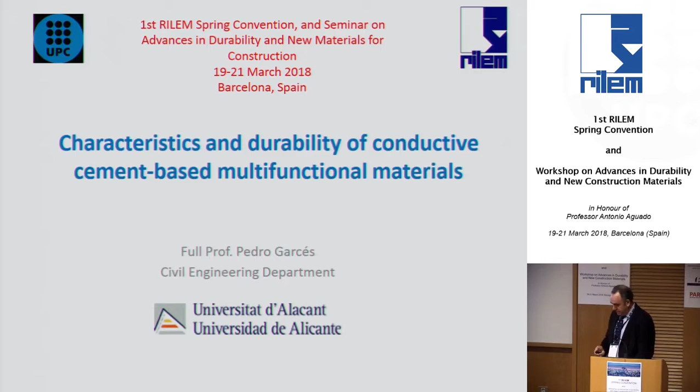It is widely known that the main function of concrete is a structural function. On the other hand, concrete is a dielectric, it's a bad conductor of electricity. However, the addition of conductive carbon materials such as graphite powders, carbon fibers, carbon nanofibers, and carbon nanotubes transforms the resulting mixture into a conductive material. This yields the possibility of using this material for other functions different than structural ones.

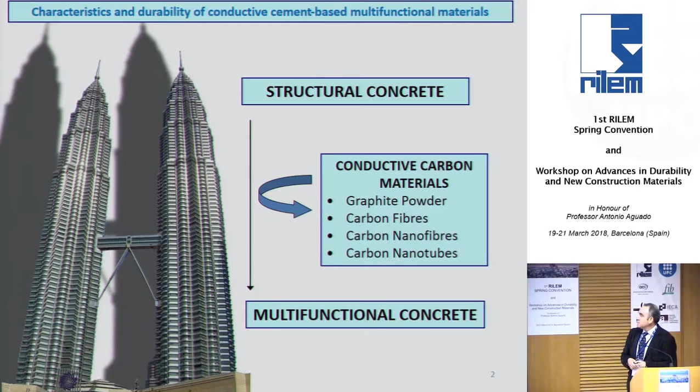Possible functions are electrochemical ones: electrochemical chloride extraction, cathodic protection, the possibility of using a conductive cement-based material as an anode in the application of this electrochemical technique is really very interesting from the point of view of durability.

Other functions not so related with durability, in which our research group is progressing in ongoing research, is the sensing function: the ability of a structural material to detect its own deformation when subjected to some external static or vibrating load. So we are in the presence of smart structures, and possible applications are structural vibration control, traffic monitoring, building safety, and structural health monitoring.

And the last one is the heating and de-icing function, to control the ice layer in transportation infrastructures.

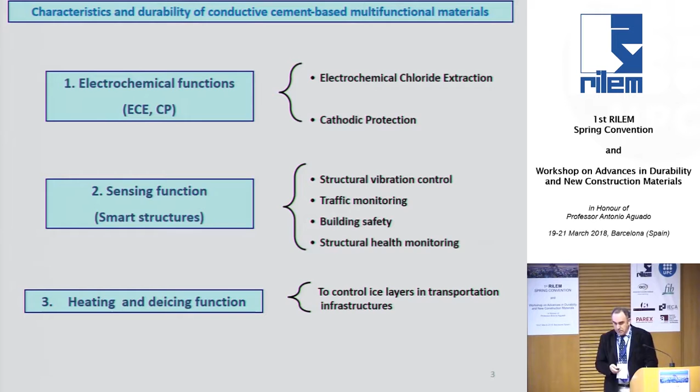As a specific task, our contribution to the MASTER project is focused on the development of the sensing and de-icing function. Here we can observe two pictures of cement-based material: with the addition of carbon fibers on the left side, and nanofibers on the right.

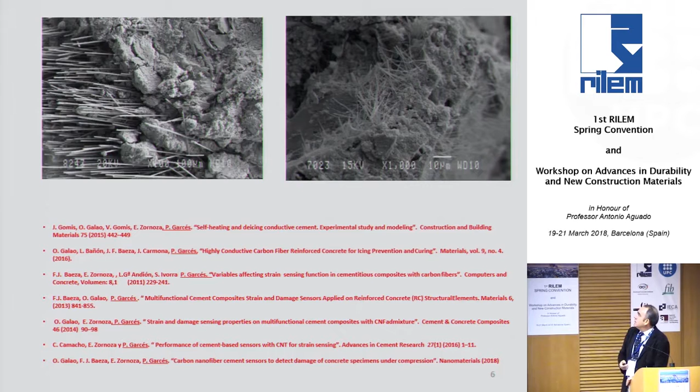Let me introduce two concepts related to my talk. The first one is percolation threshold. In order to limit the carbon additions, it is important to know the value of the property called percolation threshold. Percolation threshold occurs when there is enough density of carbon fibers to establish a continuous path of electricity.

Once the percolation threshold is reached, it is not necessary to add any more carbon fibers; it makes no sense because resistivity doesn't change significantly.

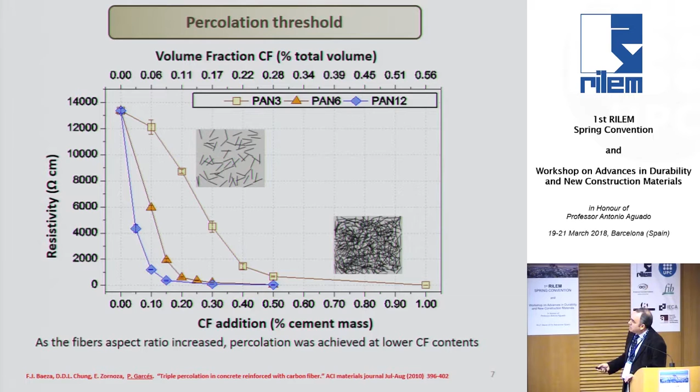Another concept related to my talk is resistance measurement. One measurement arrangement uses a sponge: a wet sponge and a copper plate, which is electrolytic resistance measurement. The other arrangement is without the sponge, using a silver paint, which is electronic resistance measurement.

In a research work developed in collaboration with Carmen Andrade, here presented, titled Electronic and Electrolytic Conduction of Cement Paste with Addition of Carbonaceous Materials.

The main conclusions, in my opinion, are: first, the electrolytic resistance of cement-based material depends on the volumetric fraction of solid cement phase acting as an insulator, and porosity acting as an ionic conductor, if water is present, of course. The second is that electronic conductive material added, such as carbon fibers, changes this behavior.

In the mix, the electrical resistance decreases in proportion depending on, first, the type of carbonaceous material; second, the size and shape of the material; and finally, the amount added, so the volumetric fraction in the mix. And finally, the interface contact between the material and the electrode is very relevant.

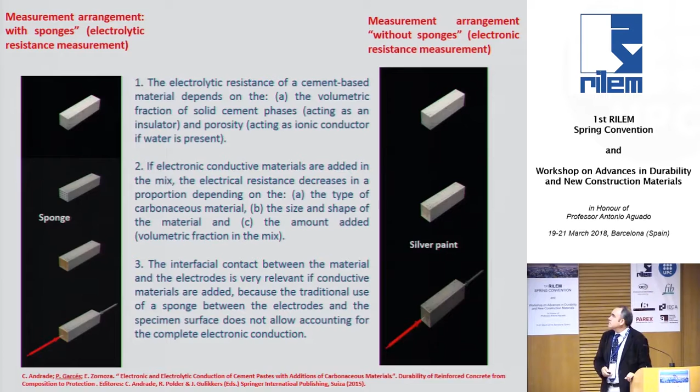Having said that, the objective of this research line has always been to develop electrically conductive cement matrix composites, paste, mortar, and concrete, so they can be applicable to the before-mentioned functions while keeping an appropriate structural behavior and durability.

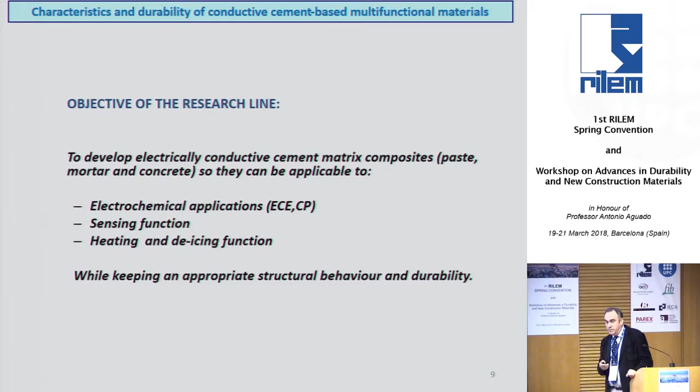Therefore, in the development of this research, we have always considered two steps. The first is the characterization of physical and mechanical properties of mortar and concrete with the addition of each and every carbon material. The second has always been focused on the corrosion level of the reinforcement in the formed cement-based materials.

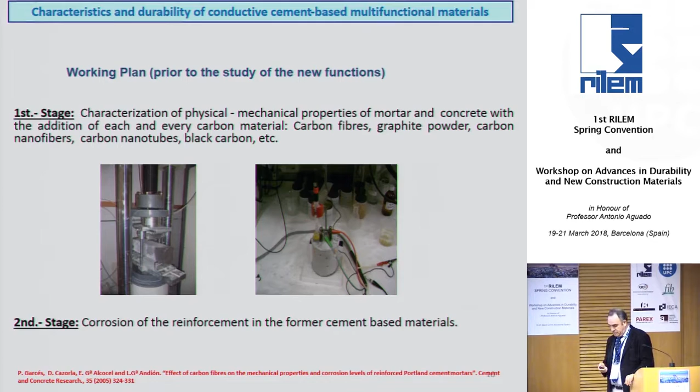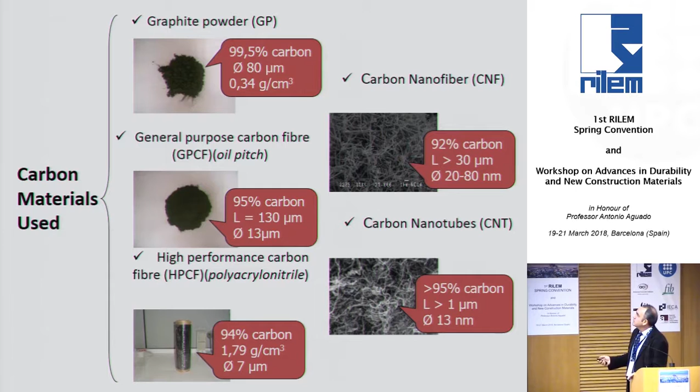Here we can see the aspect of different carbon materials used: carbon graphite powder, general purpose carbon fibers, high performance carbon fibers—the difference being in the origin—carbon nanofibers, and carbon nanotubes.

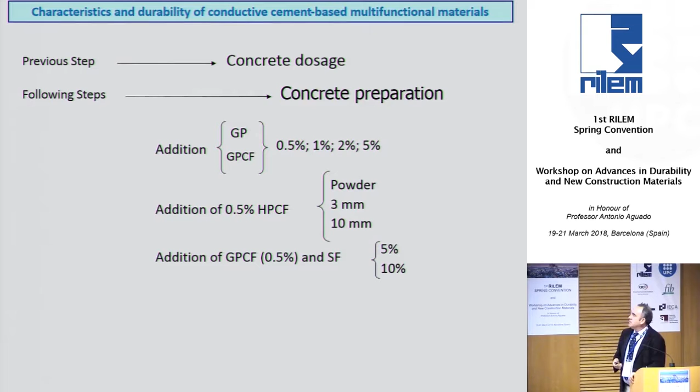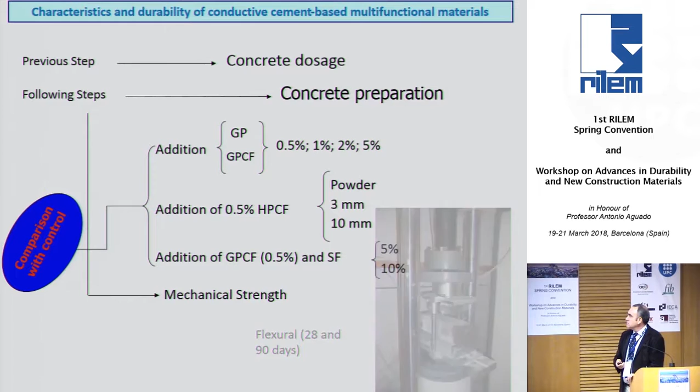In the first research study, we considered the effect of different carbonaceous materials, graphite powder and general purpose carbon fibers, with different amounts, the length of the carbon fibers, and the effect of adding silica fume alongside the carbon fibers. We always compared the results obtained with those of the control, without carbon fibers. We studied mechanical strength: compressive, flexural, corrosion, and porosimetry.

This figure presents the pore size distribution diameter range obtained by mercury intrusion porosimetry technique in concrete specimens with the addition of graphite powder on the left side and carbon fiber on the right. It is clear that the volume of intruded mercury grows when the amount of carbon addition increases.

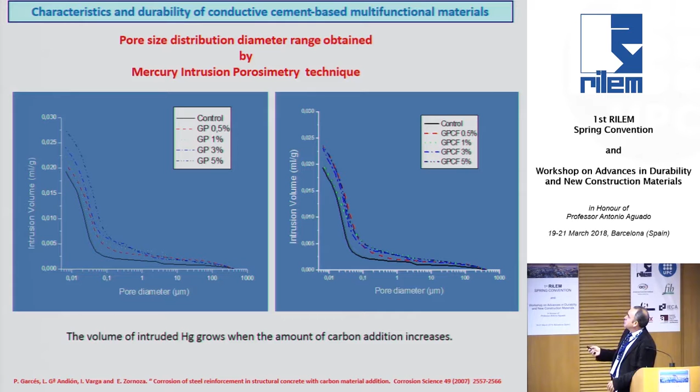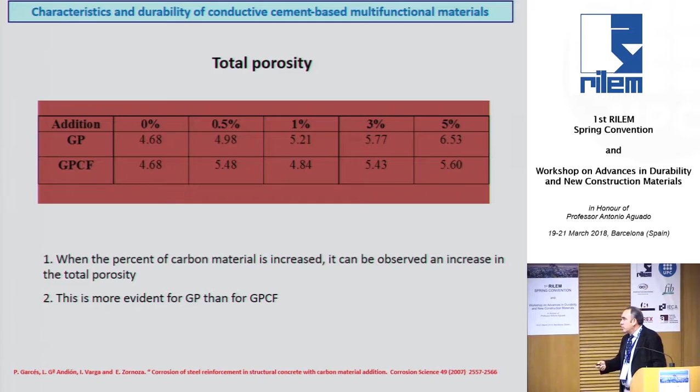This table shows the total porosity. When the percentage of carbon material is increased, an increase in total porosity can be observed, and this is more evident for graphite powder than for carbon fibers.

This figure presents compressive strength values at 90 days of curing time for concrete specimens with addition of graphite powder. It is clear that the strength decreases when the percentage of addition is increased.

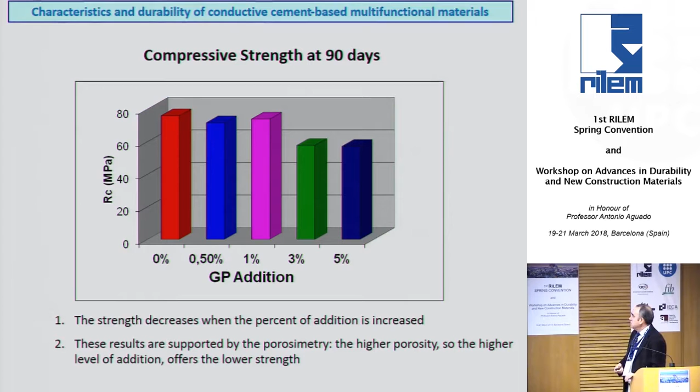These results are supported by the porosimetry data. The higher the porosity, due to a higher level of addition, the lower the strength.

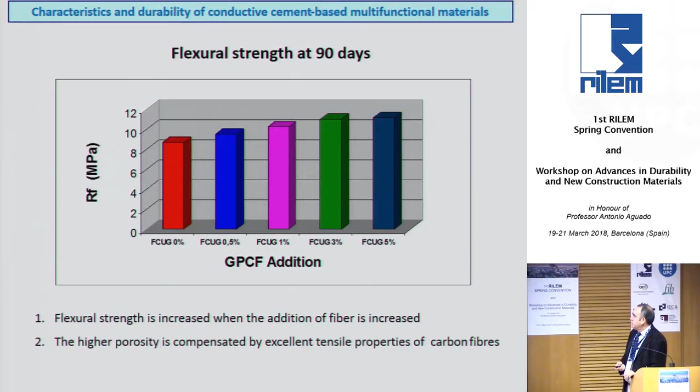Flexural strength increases as the addition of fiber increases. The higher porosity is compensated by the excellent tensile properties of carbon fibers.

This figure presents mechanical strength, compressive and flexural, with 0.5% of high performance carbon fiber at 28 days of curing time.

Regarding compressive values, only the 3 millimeter fibers show good behavior, due to the lateral confinement restraint effect.

By the way, when I say powder, I'm referring to carbon fibers with very short length. So a carbon fiber powder keeps the aspect of the fibers.

Regarding flexural values, an improvement of flexural strength is observed. The best performance is with 3 millimeters - long enough to anchor and stiff enough to remain straight.

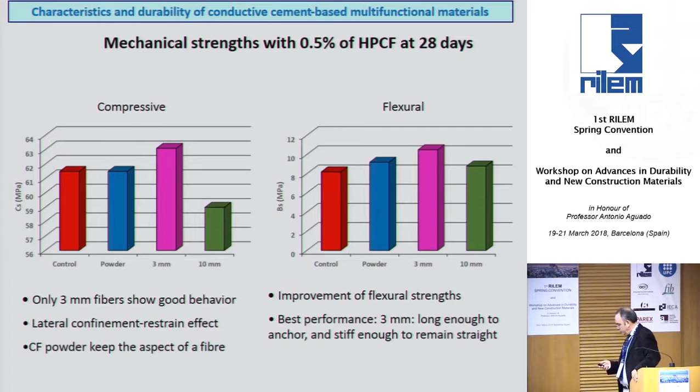When longer fibers are used, for example 12 or 10 millimeters in length, at high amounts they may form clusters during concrete fabrication. This implies that 80% of the carbon fiber mass is concentrated in a concrete volume of only 10 or 20%.

Consequently, this drops the mechanical strength of the samples, mainly the bending strength and slightly the compressive strength. Therefore, chemical and physical treatments are necessary to achieve a homogeneous distribution.

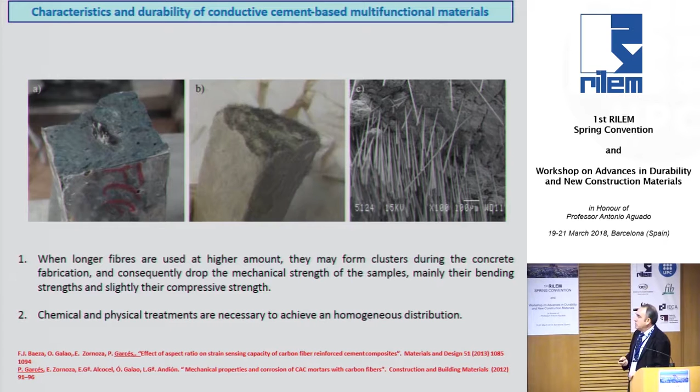This figure shows compressive strength with 0.5% carbon fibers and silica fume at 28 days of curing time, for concrete specimens with addition of both materials.

Silica fume is added to the mixture in order to increase the strength. It's a regular practice in almost all official standards.

The presence of silica fume contributes to improving the distribution of the carbon fibers and also improves the functionalization of this product.

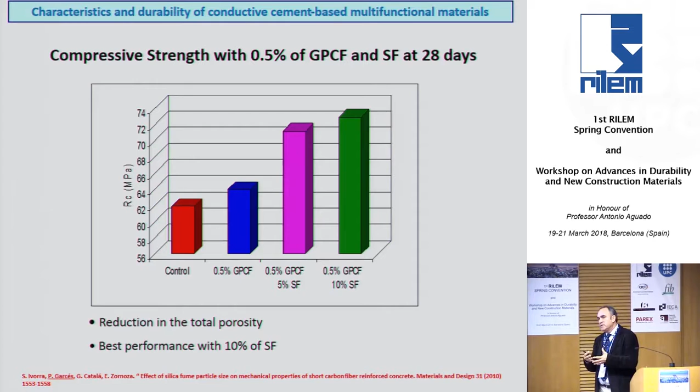However, due to the small particle size, several techniques have been developed to reduce the overall volume, and suppliers offer this product with different particle distributions. Often, users are not aware of this.

Here we can observe the particle size of densified, semi-densified, and the same silica fume after being treated with a physical sonication process. The differences in particle size are very relevant, and coherent with that are the results of compressive strength.

This is concrete with carbon fibers but without silica fume. This is with densified silica fume, semi-densified silica fume, and after being treated with the sonication process. The differences in strength are really very significant.

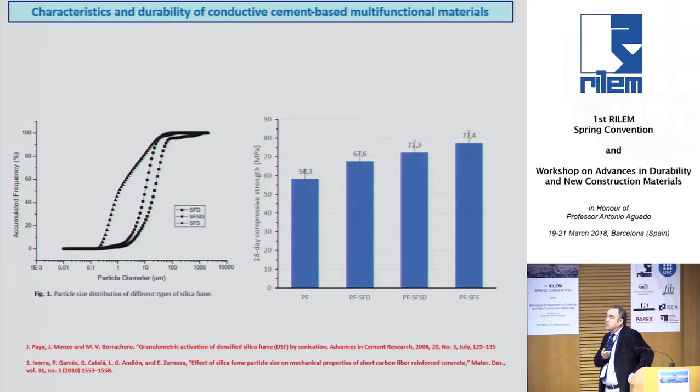On the other hand, different oxidation treatments were applied to the different carbon materials to assess the influence of modifying the carbon material surfaces on the interaction between cement paste and the carbon materials.

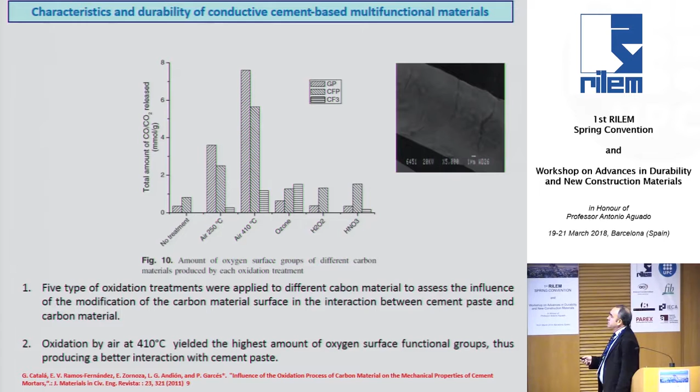Oxidation by air at 410 Celsius degrees yields the highest amount of oxygen surface groups, thus producing better interaction with cement paste, and coherent with this result, it has better resistance characteristics.

Oxidation in air at 410 degrees Celsius is the most efficient treatment to improve the mechanical properties of cement mortars incorporating these carbon materials.

It also enhances physical anchorage of the carbon material to the cement paste, due to the increase in roughness of the carbon fiber surface.

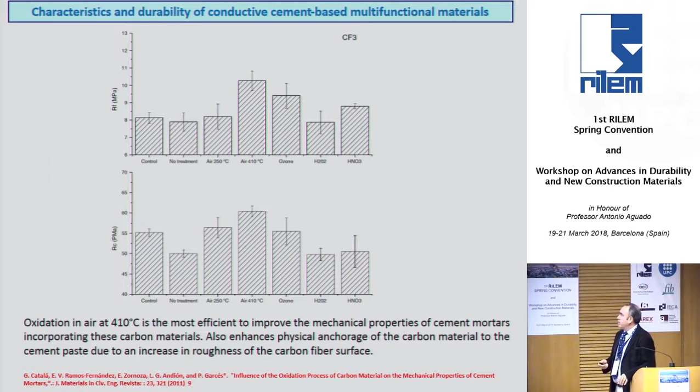Other carbon materials are carbon nanofibers. Carbon nanofibers are one of the additions that can be used to create multifunctional materials. More or less, an increase of about 5% of compressive strength can be achieved for every 1% of carbon nanofiber added to the mortars.

As there is no major modification in density at this scale, the hypothesis of carbon nanofibers acting as reinforcement for the cement matrix could be consistent.

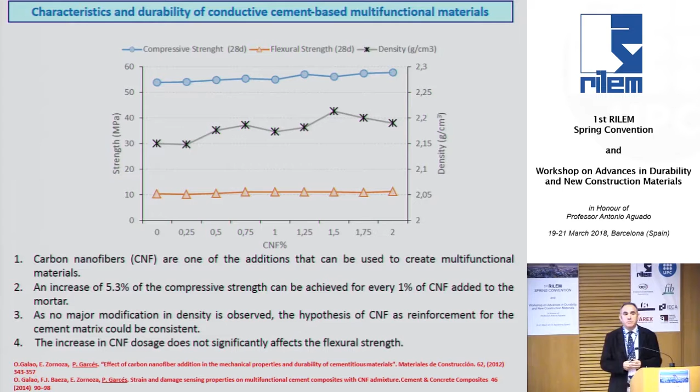The increase in carbon nanofiber dosage doesn't significantly affect the flexural strength. This is a very different behavior compared with carbon fibers.

A similar behavior was observed with carbon nanotubes. This figure shows bending strength and compressive strength of mortars with different dosages of carbon nanotubes at 7 and 28 days.

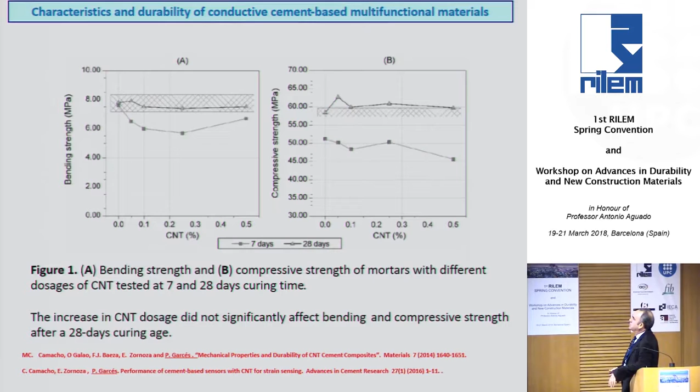It is clear that the increase in carbon nanotube dosage doesn't significantly affect bending and compressive strength at this period of curing time.

On the other hand, new binders whose manufacture that involves neither the emission of pollutant gases nor high energy consumption is heavily researched today. Perhaps the more important example is alkaline cement.

In this figure, we can observe an electron microscopic image of alkali activated slag mortars with 3% of carbon fibers.

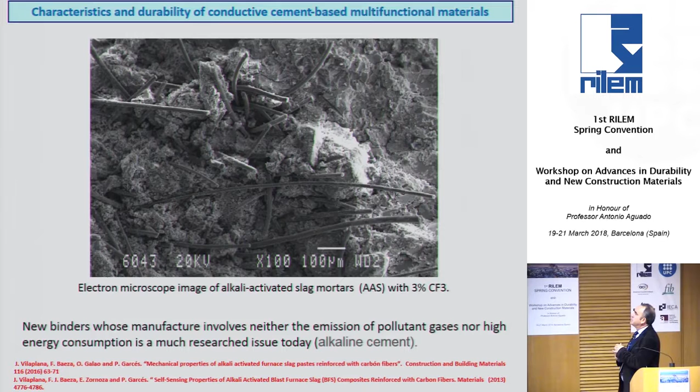Water glass, slag cements, and concrete are characterized by their ability to develop a strength comparable to the strength of Portland cement.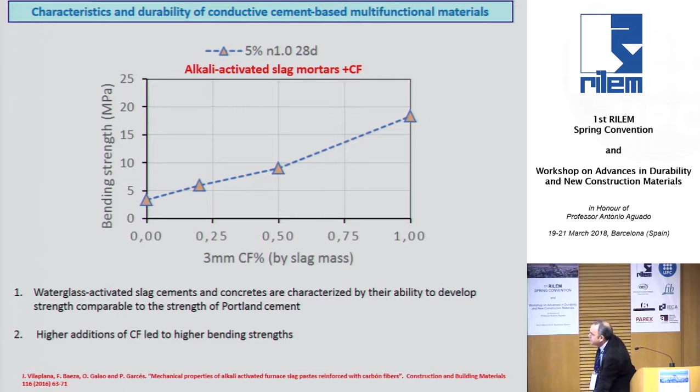Higher addition of carbon fibers led to higher bending strength, as expected. However, the most important effect of carbon fibers in these particular binders is related to the drying shrinkage.

This value was around 3 to 4 times lower in Portland cement, which is the solid points or the line almost superimposed, than in alkali activated slag mortars.

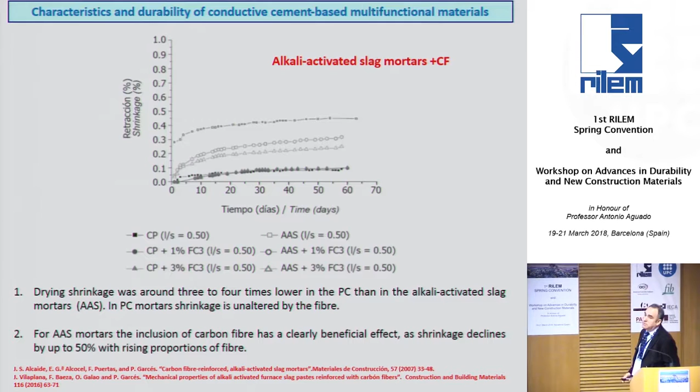In Portland cement, the mortar's shrinkage is unaltered by the fibers. In alkali activated slag mortars, the inclusion of carbon fibers - without carbon fibers, with 1% carbon fibers, with 3% carbon fibers - has a clearly beneficial effect. The shrinkage declines by up to 50% with rising proportion of fibers, and that is really important in these particular binders.

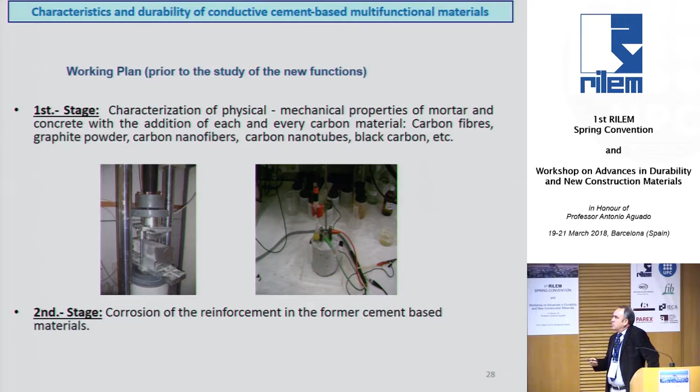The second stage was always focused on the corrosion level of reinforcements in the former cement-based materials.

Here is presented the corrosion rate of reinforcements in concrete specimens with addition of graphite powder, introducing a solution of sodium chloride.

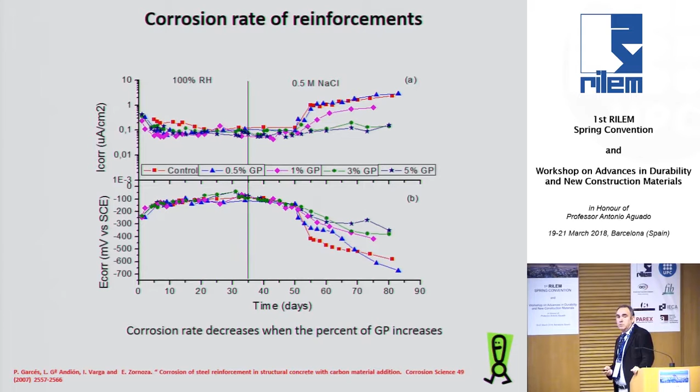Corrosion rate decreases when the percent of graphite powder increases. It was an unexpected result.

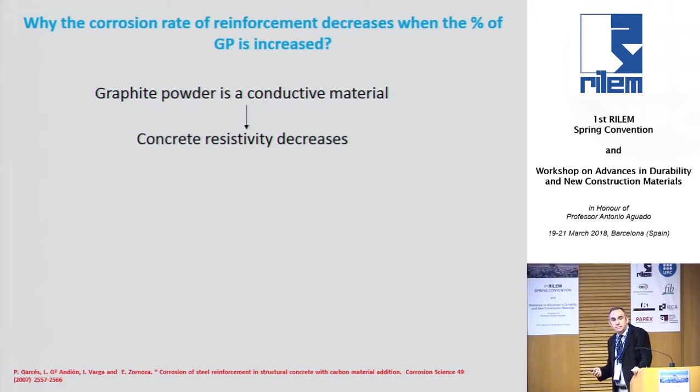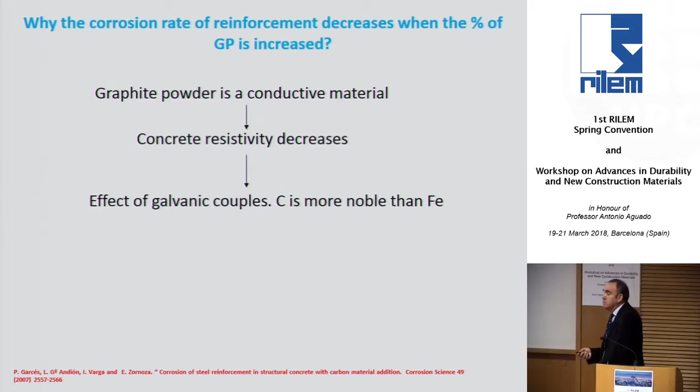First, graphite powder is a conductive material, so concrete resistivity decreases. On the other hand, we should take into account the effect of the galvanic couple. Carbon is more noble than iron, so it implies the development of the corrosion cell and an increase in corrosion rate.

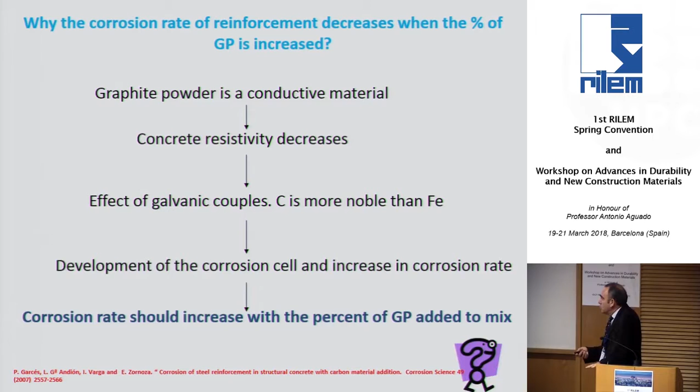However, corrosion rate should increase with the percent of graphite powder added to the mix.

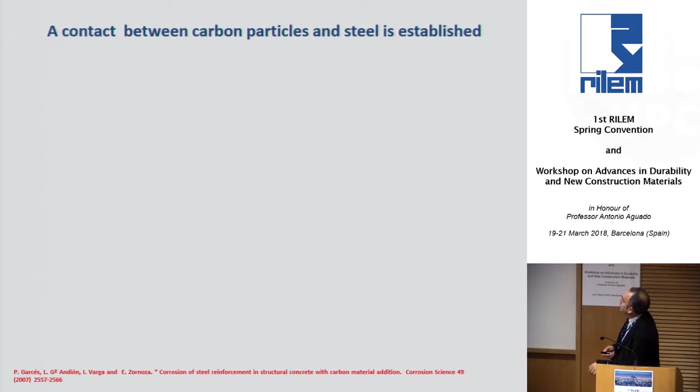Different hypotheses could be considered. The first one: a contact between carbon particle and steel is established, so there is a contribution to the corrosion kinetics of steel and carbon materials.

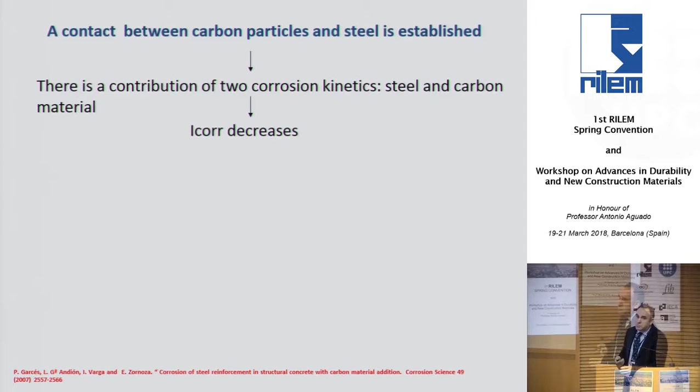So corrosion intensity decreases. The second one, the most important in my opinion, is that oxygen adsorption in the carbon particle hinders diffusion. Most of the corrosion process involves a cathodic control, and in this case this is important.

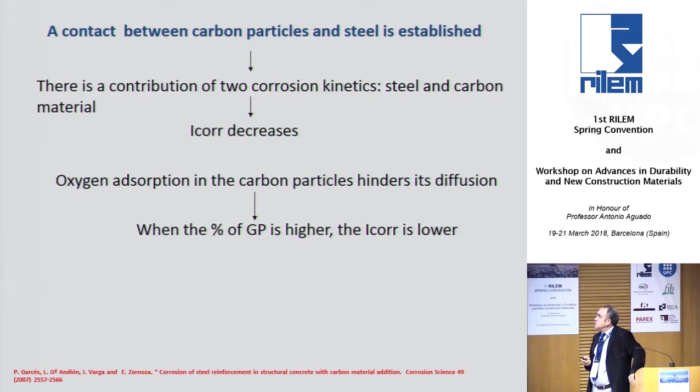When the percent of graphite powder is higher, the corrosion intensity is lower.

Finally, we have observed that the contact between steel and carbon implies a shift to more positive values of corrosion potential, meaning a more compact passive layer on the steel surface, and so the lower corrosion intensity.

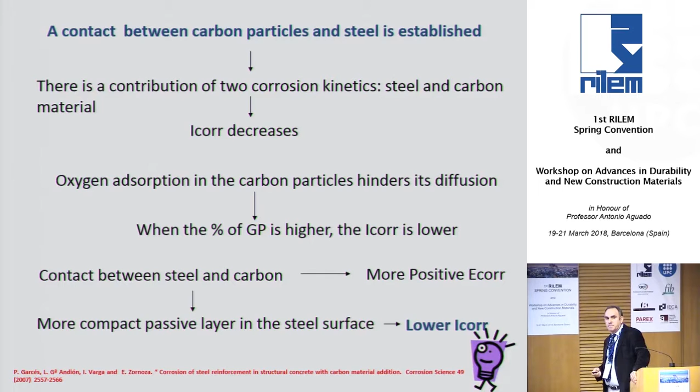Nevertheless, when we consider other cement matrices and other carbon additions, such as carbon nanofibers, the corrosion intensity increases slightly when the amount of carbon nanofibers in cement paste increases. This was expected.

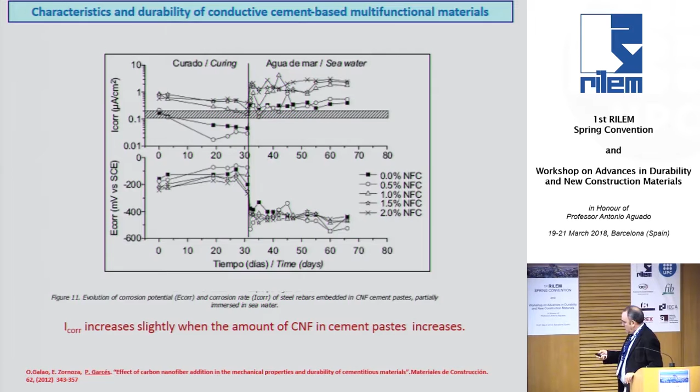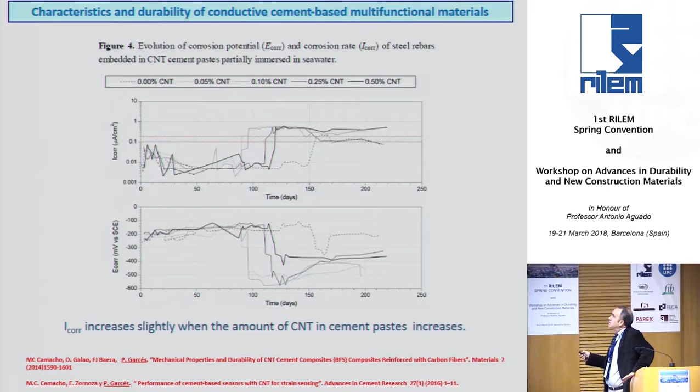Similar behavior was observed with carbon nanotube paste. Corrosion intensity increases slightly with the amount of carbon nanotubes in cement paste increasing. It's not very significant, but it's clear.

The main conclusion is that the addition of carbon materials to concrete can improve its mechanical properties and produces different levels of corrosion depending on the type of carbon material or cement-based material.

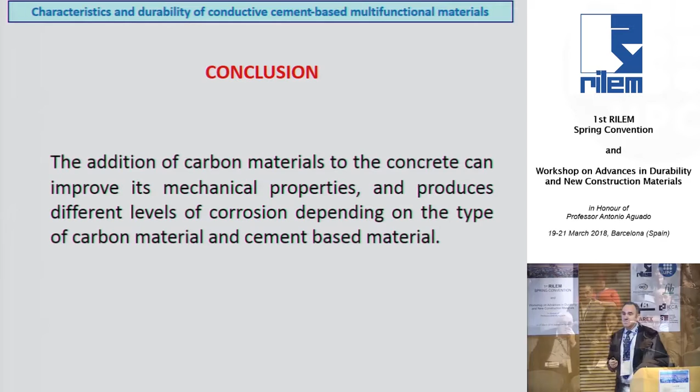The electrochemical application is very interesting from the point of view of durability. These techniques, electrochemical chloride extraction and cathodic protection, consist of applying a current density between the steel reinforcement connected to the negative pole, the cathode, and an externally deposited electrode acting as an anode connected to the positive pole.

Since chlorides are negatively charged ions, the imposed force field causes them to migrate from the rebar to the outside, without the need to remove the concrete affected by a high concentration of chlorides.

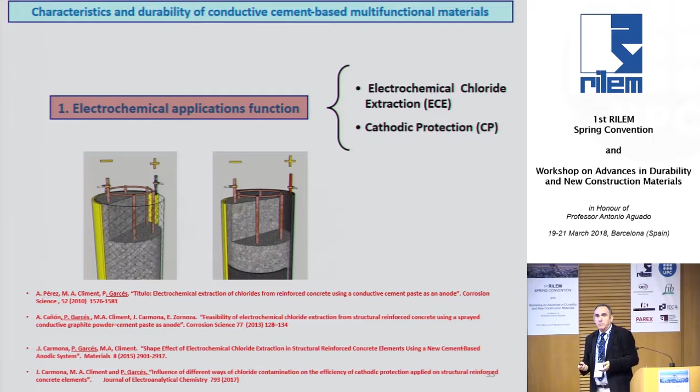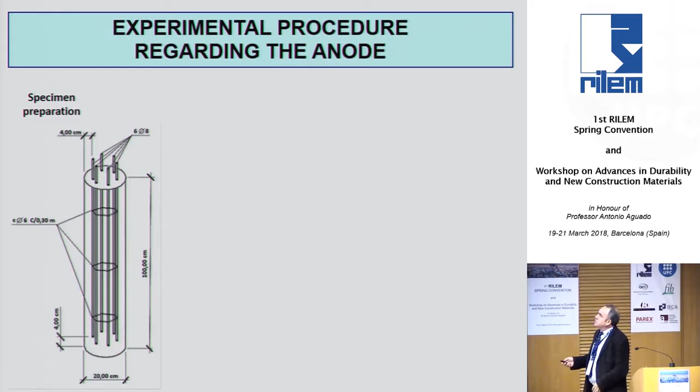Regarding the experimental process: first we prepare the concrete specimens, then after 28 days of curing, the anode placement in our proposal is done by guniting the conductive cement paste over the surface, applied like a plaster.

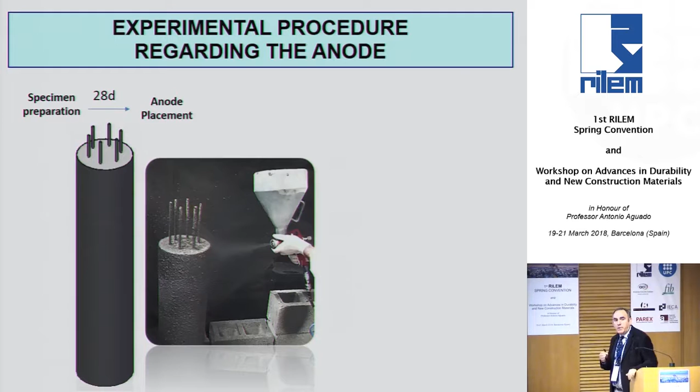Then the electrolyte placement - a wetting system based on drip irrigation is attached around the sponge in order to ensure the liquid is in contact with the anode.

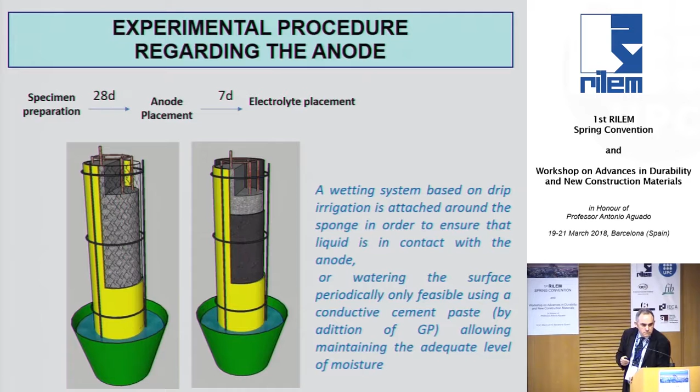The other possibility, only with our proposal, is watering the surface periodically, only feasible using a conductive cement paste due to the high level of porosity, allowing maintenance of an adequate level of moisture.

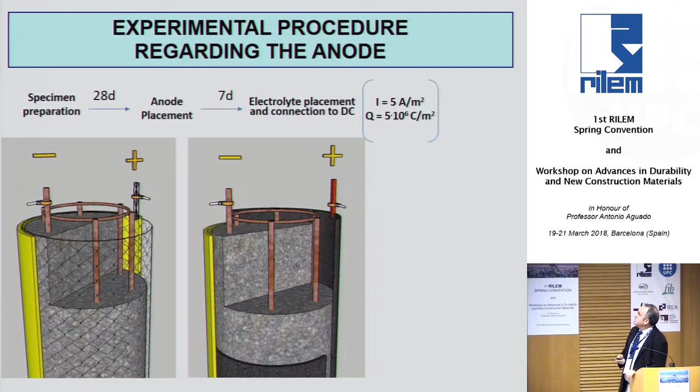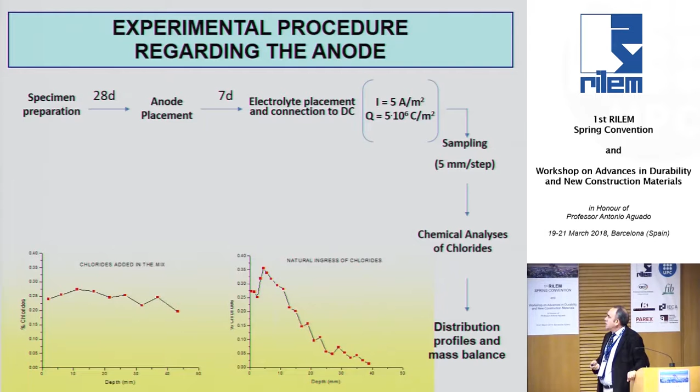Then the electrochemical parameters: current density and applied charge. Then different samples were obtained at different depths. Then a chemical analysis of chlorides, and then obtaining the distribution profile and mass balance.

This is the result obtained with a traditional anode. The yellow line is the initial distribution profile of chlorides, the purple is the final distribution profile of chlorides, and the green is the efficiency.

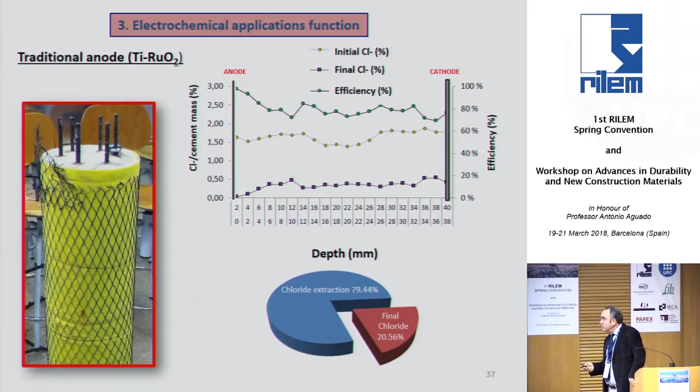In any case, almost 80% of chlorides were extracted, and similar behavior with our proposal, with our conductive cement paste, more or less 80%.

The potential advantage when compared to other traditional anodes is the possibility of application as a final layer by guniting, with very similar efficiency. The adaptation to various types of surfaces, vertical to more complex, is very important. Also the possibility of reutilization, and to summarize, the versatility of the paste.

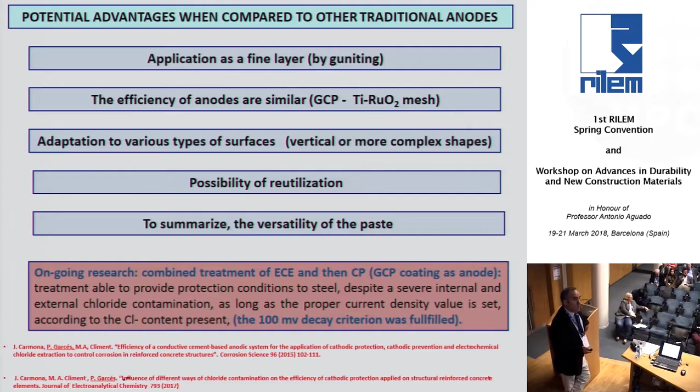Our ongoing research is a combined treatment of electrochemical chloride extraction and cathodic protection. This treatment is able to provide protection conditions to steel despite a severe internal and external chloride contamination, as long as the proper current density value is set according to the chloride content present. The 100 millivolt decay criterion was fulfilled.